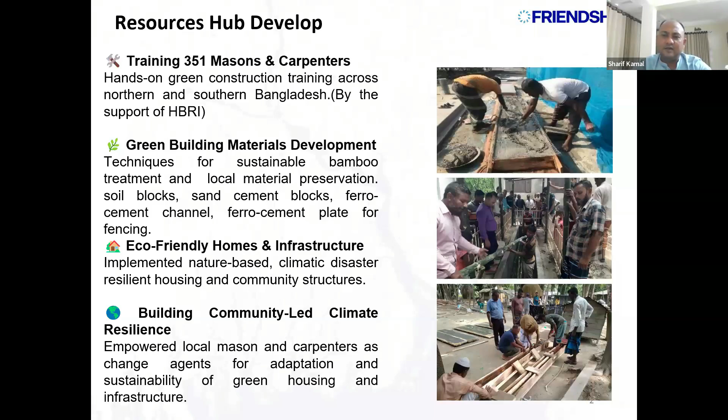Next, we developed 22 entrepreneurs and supported them with micro and medium scale machinery, like semi-automatic hollow block machines, in the southern part of Bangladesh. And now many houses and infrastructure are being developed, and many job opportunities have been created by developing these entrepreneurs.

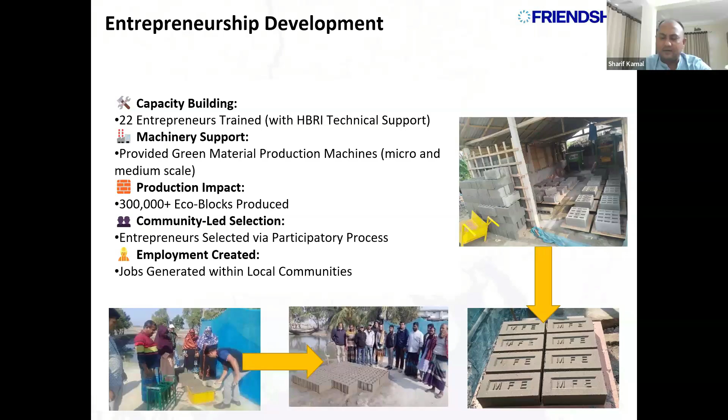And another intervention, resilient homes and infrastructure for the northern part of our country. Every year the northern part of Bangladesh is facing floods. These floods come severely every year. That's why this place is 100% using

environmental methods, like we develop this cluster village by sand filling, and this sand is collected from nearby the river. By collecting this sand from the nearby river, on one side the river's capacity also increased, and this also reduces the flood risk of Bangladesh.

And from the beginning of this construction, we always take the community's decision and community engagement. Every moment we engage the community, from land selection and beneficiary selection. And during the construction period, the community people are also involved. In total 120 families during the flood period

we support them. 25 families are permanently living in the housing, with green infrastructure, the grasses to protect this plinth.

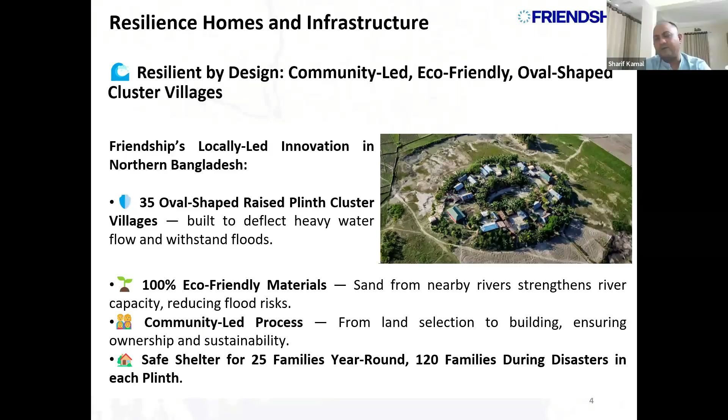And another one for the cyclone-prone coastal area of Bangladesh, we already developed 6 climate resilient houses in 5 coastal sub-district areas and 3 more houses are under construction. We construct these houses by using locally collected and eco-friendly materials.

We build these houses by collecting the sand from the nearby river, by mobilizing the local community people on how to build these houses, how to build the sand cement hollow block, by using the local materials. And for the floor, we use the ferro cement channel.

You can see the middle portion on the right side. This is the channel. We build this channel with technical assistance from the HBRI. HBRI supports them with technical assistance on how to build this ferro cement channel, how we can set and fix this ferro cement channel in our houses, and we secure five families during the cyclone or tidal surge.

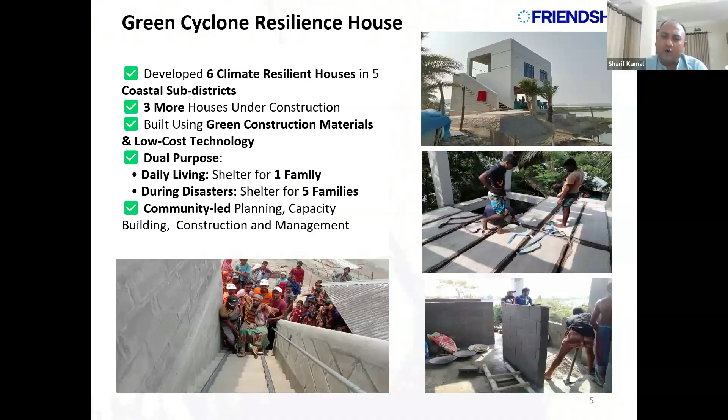Total 45 houses will be built, and we will use wood and tin CGI sheet to build these houses. We have a design and plan to make a loft in the middle portion of these houses. During the flood, they can take shelter in the loft. Total 3 families can take shelter in each house during the flood.

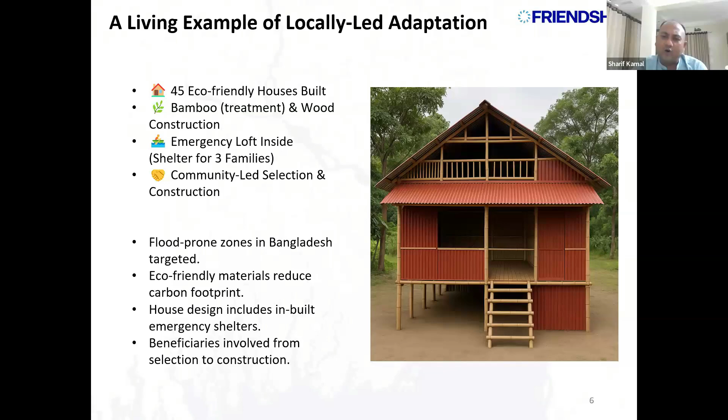And another intervention we are implementing in part of Bangladesh. It's a very unique design. This is called a static cum floatable latrine. This static cum floatable latrine in the normal period is used as a static latrine. You see in the picture, there are 5 drums. We connect one flexible pipe to our septic tank.

In the normal period they can use this very easily. During the flood or tidal surge period, this latrine automatically floats a maximum of 4 or 5 feet high. At that time they can use it the same as usual in the normal period. And a total of 10 families can use this latrine during the disaster period.

Basically, this latrine is designed to secure the water during the disaster, to reduce waterborne diseases, and so they can continuously use their latrine. So we built this latrine. Total 70 static cum floatable latrines we already developed at our community level.

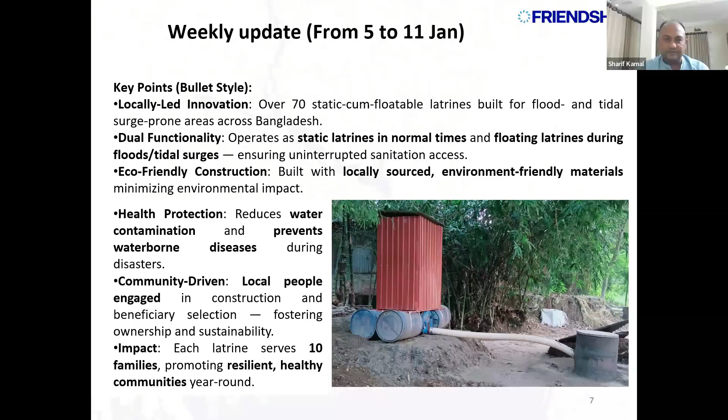And another green infrastructure my other colleague Mumtaz Bhai can discuss. I request Mumtaz Bhai to discuss this green infrastructure. Yeah, thank you very much, Sharif Bhai, for giving me the opportunity. So as Sharif Bhai already mentioned, the eco-friendly materials.

So we are working on the Novopollo project that is funded by FCDO. We are building many connecting roads, access roads, and also supported people with hollow block and solid block machines for producing environment friendly construction materials.

So here we can see we have constructed 12.23 kilometers of eco road with slope protection with environment friendly materials, and we are building 5 climate resilient cattle sheds, and we are now working on building 1,250 plus homes and facilities. So if we look at the picture on the top right and left side, these roads are constructed mainly with uni-blocks.

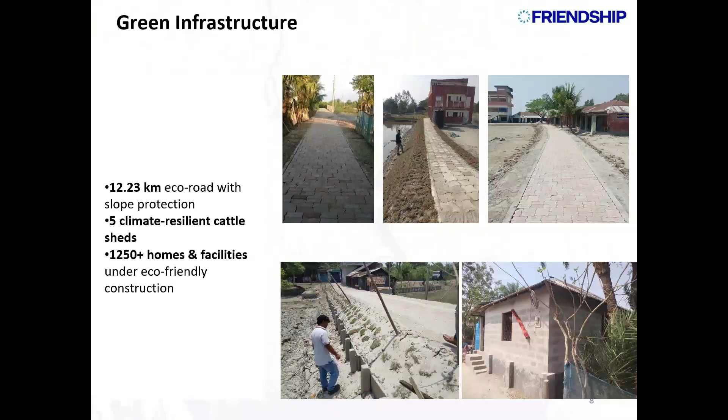And in the bottom, we can see we used uni-blocks in the roads. Also, this is our innovation: usually the palisading works are done with an RCC slab that is 4 inch or more than 4 inch thick. But instead, we are using a ferrocement plate that is only 1.5 inch. We experimented, and their strength is almost similar to the RCC block, as the thickness of this plate is almost 1/3

of the concrete block. So we are using less cement, less MS bar, and no stone or brick chips. This way we are contributing to reducing carbon dioxide emission.

Thank you, Sharif Bhai. Over to you. Sharif Bhai, do you hear me? Palashda, do you hear me? I think Sharif Bhai lost the connection, most probably. Am I audible, sir? Yes, sir, you are audible. Can you or anyone from your panel carry on the presentation, sir? Mr. Palashda, are you there? Palashda, can you hear us? I think the moderator also lost the connection. They are joining from quite remote locations. Sorry for the interruption. Hello, Sharif bhai, can you hear me? I think Sharif bhai is out of connection. Okay, Palashda, you can go ahead.

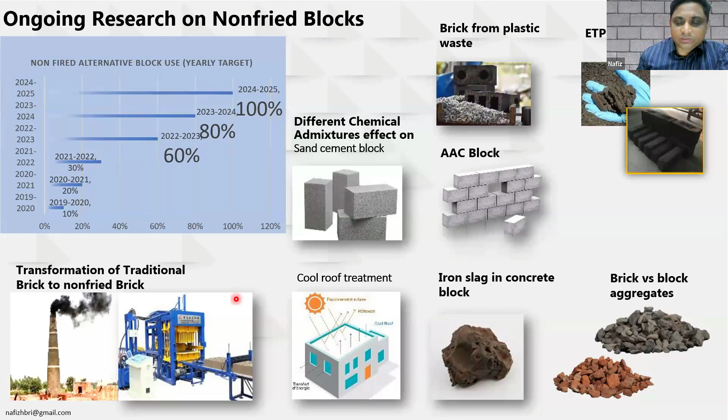So, sand cement brick machine. If we consider half of the 7,000, almost 3,500 of this type of factories all over the country, we need a huge amount of this machine. So there is a huge program coming up in this sector. And we are also conducting another research, studying the sand quality of different rivers, so that if any entrepreneur comes to us, we can give them suggestions on the recipe of the block with the sand from the nearby river.

And another study shows that if we construct a 1,000 square feet floor area house with walls of traditional brick, it will emit almost 7.2 tons of carbon dioxide. But if we use this type of hollow blocks, it will reduce to 4 tons. And if you go further with AAC block, autoclaved aerated block, which is very lightweight and new technology and requires a big industrial setup, it will emit only 3 tons, almost half.

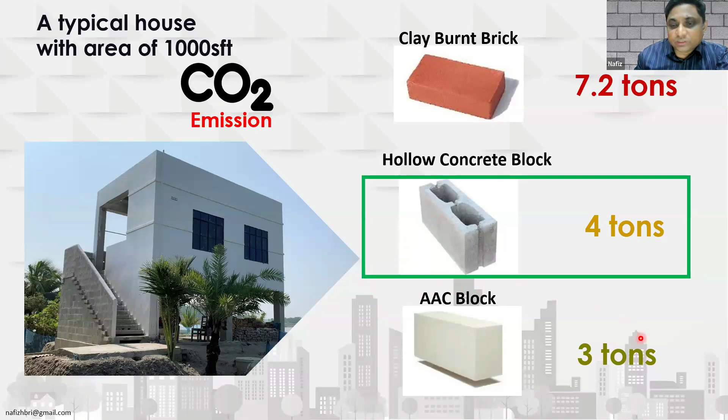So now we are focusing on intermediate technology, concrete hollow blocks. We are promoting this because it is easily replicable and easily manufacturable in any part of the country. And later on, our aim is to go for this type of AAC block in future. So from HBRI, we have been focusing on several disasters. We have developed some housing prototypes like this.

If we see the top left corner of this slide, you can see this circular shape steel house we have developed for coastal areas. We have developed this in Satkhira, and then riverbank erosion areas. This building looks permanent, but it is dismantleable. There are nut bolt joints, so we can dismantle it and shift it to another place. And this is for flood prone areas. This is a floating house. This house is made out of concrete, but it floats during flood.

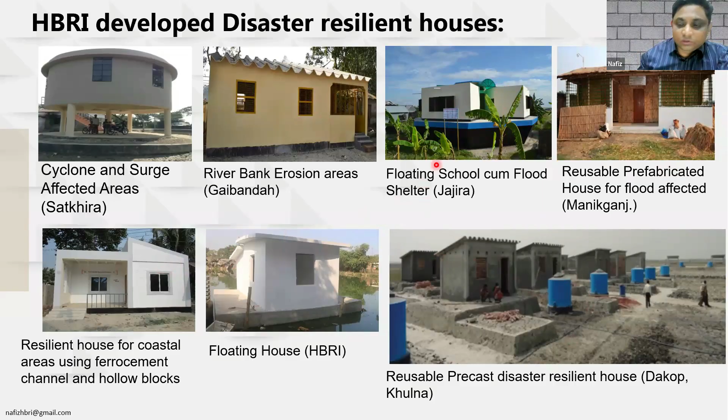And this is a prefabricated house for flood affected areas. So we have different types of housing, and in the right bottom corner you can see some photographs. We have developed almost 200 houses in Dakop, Khulna after Aila. So we have developed different types of housing for different parts of the country, and this is another research we conducted in 2007-8.

During that time, actually, this is the eco housing concept. This is the concept of making an eco village. The house will be served by natural resources like solar energy, wind energy, and then biogas. We have introduced the rainwater harvesting system here. We utilize the locally available building materials.

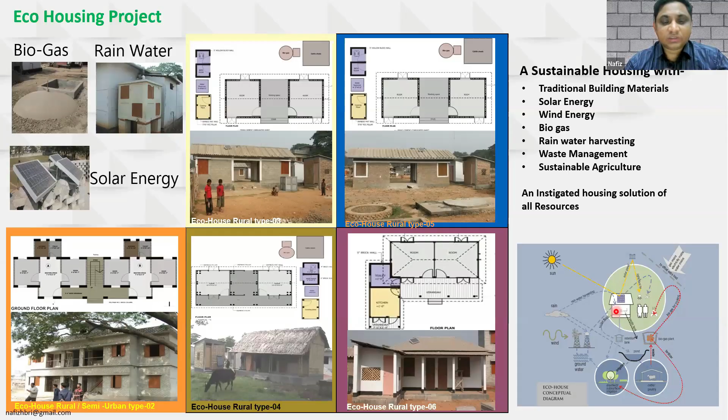So lots of things actually accumulated in a single project, and from the findings of the project, actually we have updated the national building code later on. So we include these sorts of findings in our national building code.

This is a plastic bag, and we are pouring mud and then ramming and laying layer by layer, and we can build this dome shape house. So this is very stable under disaster. So the idea is that after a disaster, we only require to ship this bag roll, which is very lightweight, and then the local community can build emergency shelter there. So this is the idea of this training.

We also developed some guidelines. So we had one project with the support of JICA. So 6 universities from Bangladesh and 4 universities from Japan actually worked together for developing this earthquake resilient guideline in urban areas. So we have 5 guidelines developed. So this is another policy intervention we have done for earthquake.

And this is the National Building Code I mentioned earlier. So it actually derives from the Building Construction Act 1952. And now we have the updated building code, BNBC 2020. And in this building code, actually, we introduce another chapter, energy efficiency and sustainability. So we tried to make our building code more green.

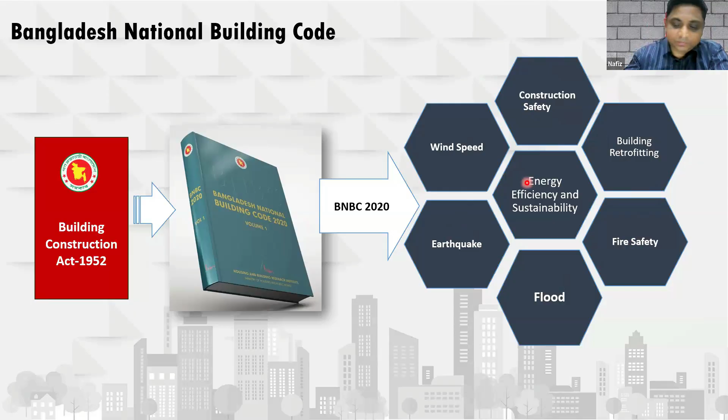So even after every disaster, actually, the first victim is the household. So households and the people living in disaster prone areas actually have to spend all of their savings for either maintenance or repair of their household. So our idea is to provide some technologies or develop some technologies whereby they can make their home more permanent than before.

And you can see the recent past three remarkable or big cyclones that occurred in Bangladesh: Sidr, then Aila, and then Amphan. Those three have different characters. But if you see the bar chart on the right, you can see the damage in households. So the damage also reduced for permanent and partial because the construction technique, practice and awareness grew. But still, there is a huge scope to address these sorts of issues.

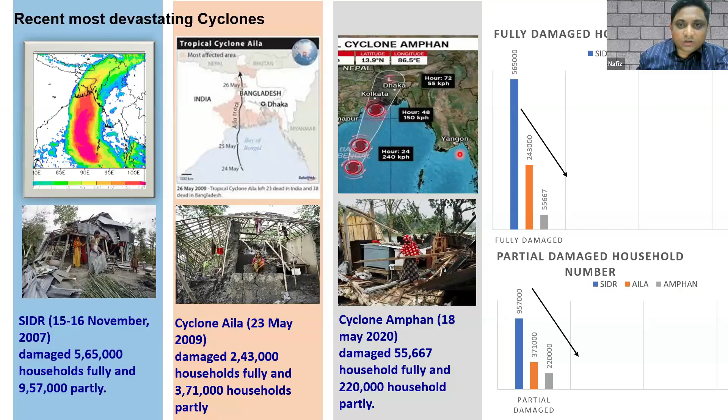So keeping in mind that, we have developed a guideline with the support of Friendship and the Shelter Cluster: a standard guidebook for rural housing. In this guideline, we address this sort of disaster, and we try to give some solutions on whether they can build more permanent households with our research-based technology.

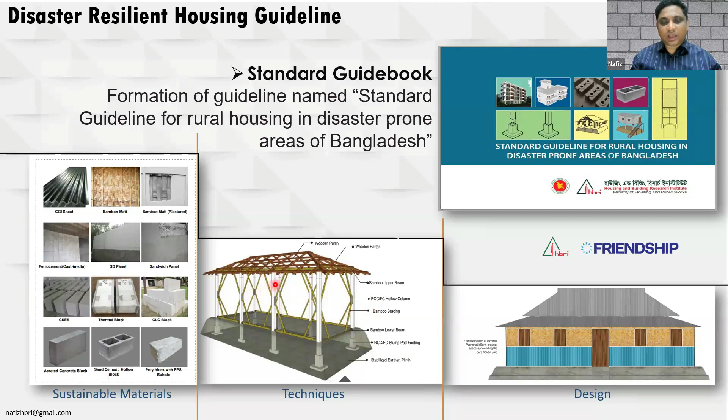Like, we have developed concrete blocks, hollow blocks, thermal blocks, sand cement blocks. So you can even see how we can update or make an estimate of the structure with available or existing building materials as well.

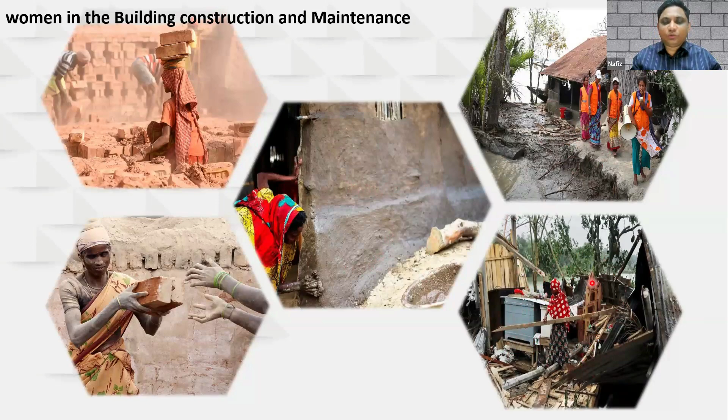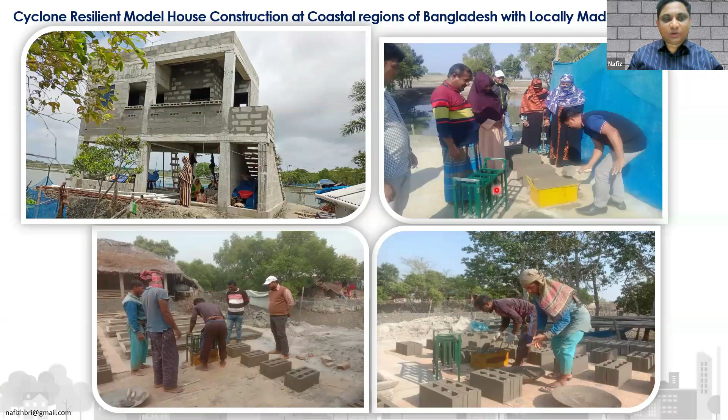So keeping this in mind, we try to train the local women with the support of Friendship, so that they can take the lead in reconstructing their household and developing their house. So this is one household we have developed with the support of Friendship in Satkhira areas. The women were trained up and they guided the local craftsmen how to make this house, and they also supervised there. So this is the change we are trying to bring in the practice.

And we already got the national award for the environment in 2018 for our research and development, mostly environment friendly brick production. I thank you. That was all about my presentation. Thank you.

Thank you, Nafiz sir, for highlighting the critical role of policy integration using local constructions and research in scaling up resilient infrastructure. That was incredibly informative. And also thank you, Shorib Bhai, for the insightful overview of community-driven infrastructure and sustainable construction materials.